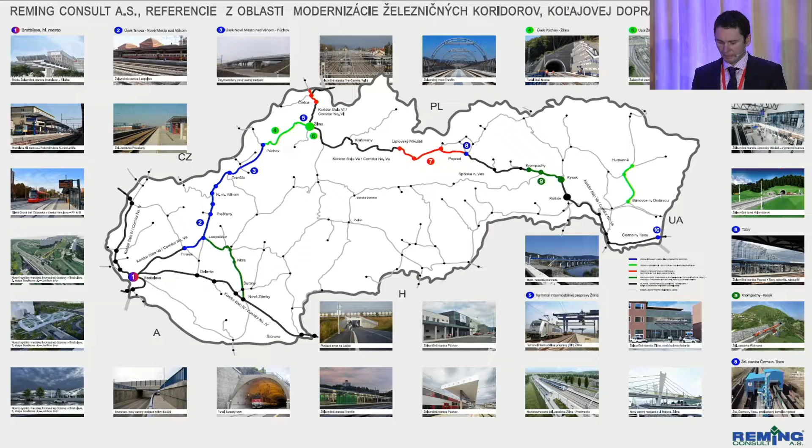If you are on the train and you go from the west to east, many of our projects are deployed on this route. When we talk about BIM and railways, the other European countries started to join the BIM environment much sooner. Previously, London, they really went from A to Z, did everything that was supposed to be done, all of the components. They did have various CDE environments, zillions of documents, and everything worked well in this environment.

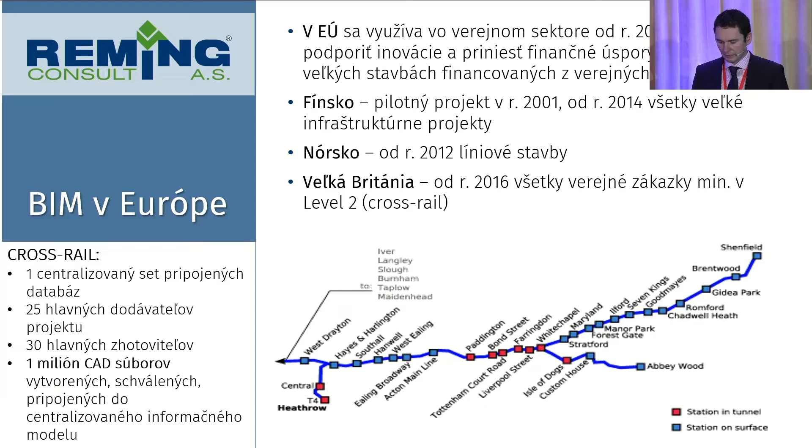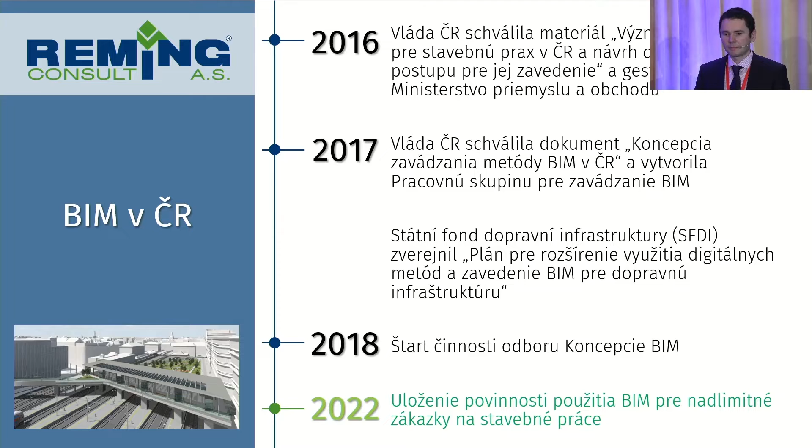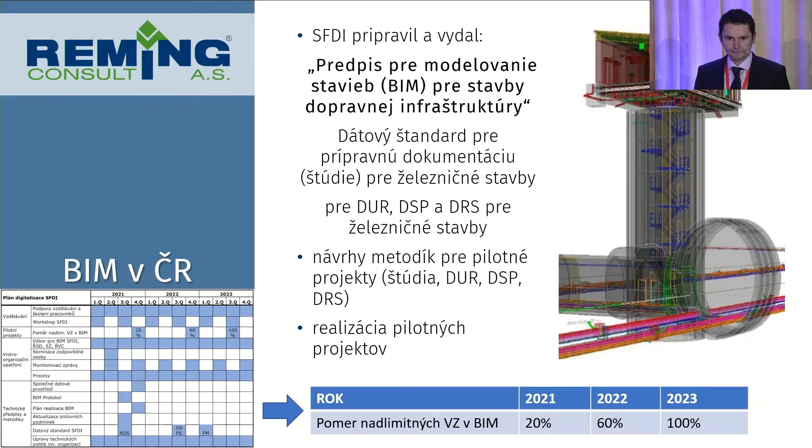When we take the Czech Republic, they are much faster than us. Next year, they will be obliged to use BIM for projects above a certain financial limit, and they also have a decree for BIM modeling for infrastructure projects. This year they are at the level of 20%, next year at 60%, and in '23, 100% of their projects should be carried out through BIM.

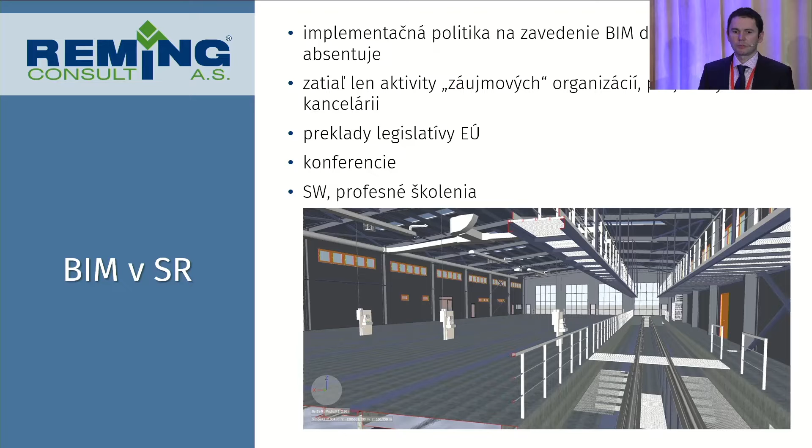Unfortunately, we do not have the right policy. So far, it is only an initiative of associations, interest groups, and businesses, and there is more and more software out there in the market, but there is no systemic effort. How do we define BIM? I would use the US definition: digital representation of functional and other types of characteristics of structures. BIM creates a reliable basis for decision making in the life cycle of a structure from the very beginning until the elimination of the building.

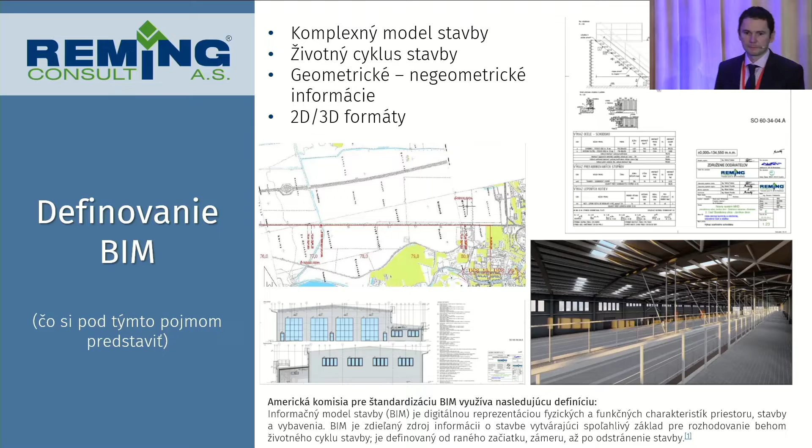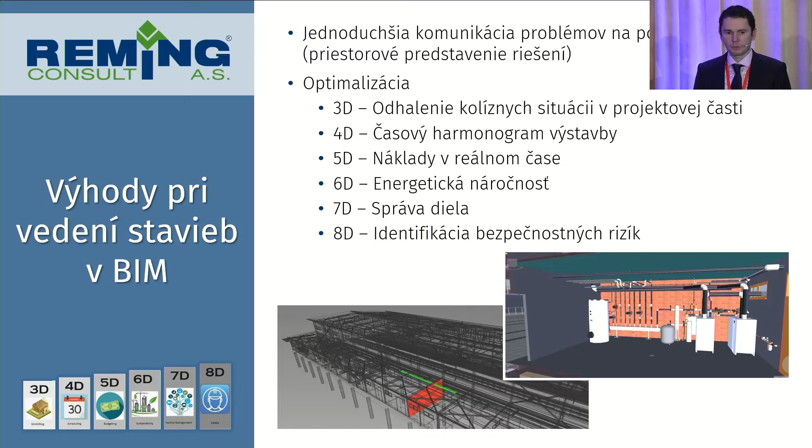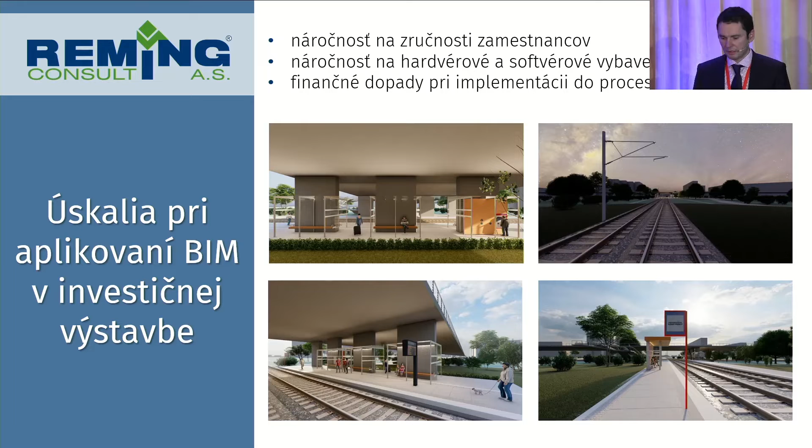What kind of advantages does BIM offer? Many think it's only about design, but there are many other components, and each of the companies deploying big projects does those things anyway, but those individual components are not combined into a big whole. What are the challenges? The employees need to learn new skills, and the company needs to have both software and hardware. And many times, since people have a certain idea of what it is, they can't define it. Here we see railways in Petržalka, close to Bratislava, that are to be implemented soon.

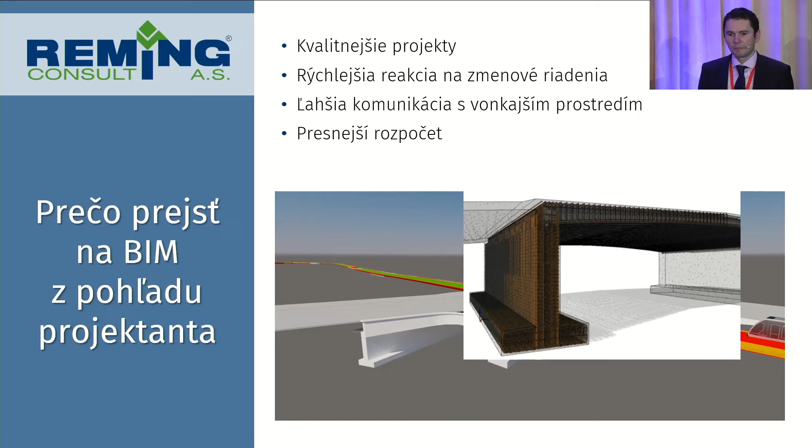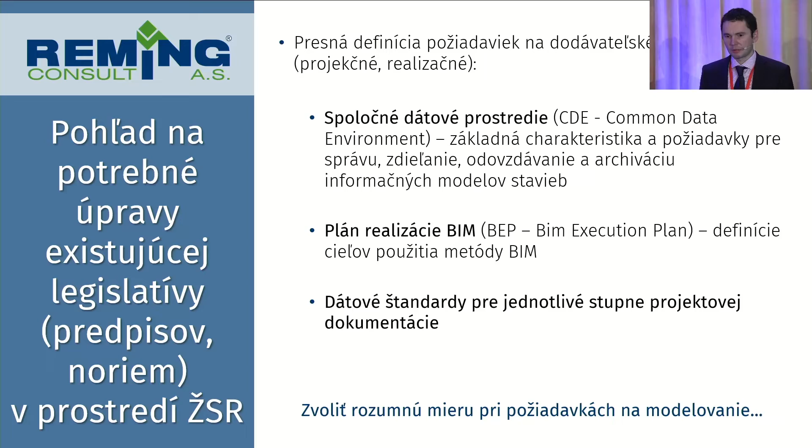What do we want to achieve? Why should we start using BIM? We want projects of higher quality and a lower number of mistakes during design, because in 2D design, maybe we don't realize some of the mistakes. The lower the number of mistakes, the faster our reaction time and our efficiency, and since we have a more comprehensive model, we have a more specific budget. What do we need to do? We need to define a common data environment that will be the backbone of communication in the project. We need to correctly design a BEP, the plan, and we need data standards that we do not have so far under our legislation.

This is a visualization from the Žilina project. Why make videos like that? We do EIA and studies, and we also need to deal with public discussions of the projects. And of course, you meet people there who can't read the drawings. This kind of visualization gives them a better idea of how the project would look and what we are going to do.

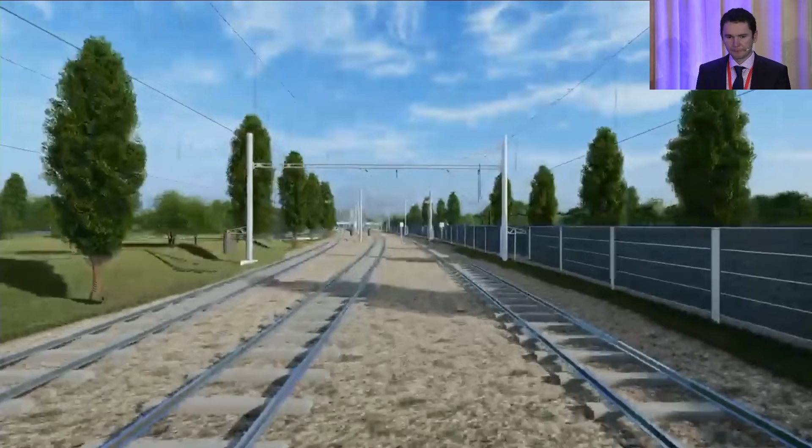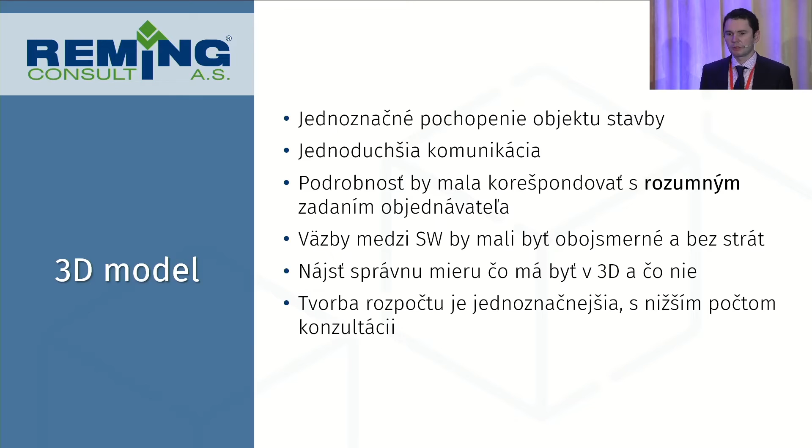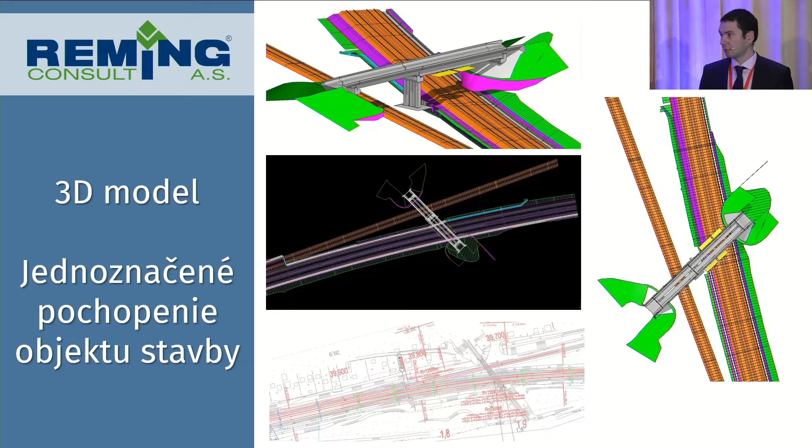3D modeling gives a clear understanding of a structure. Of course, it brings about easier communication. Of course, it should correspond with the meaningful requirement or definition of the investor. It can also help us to clearly understand the structure, it is understandable to laypersons or representatives of other professions, and this visualization can show us details that we would otherwise not take notice of.

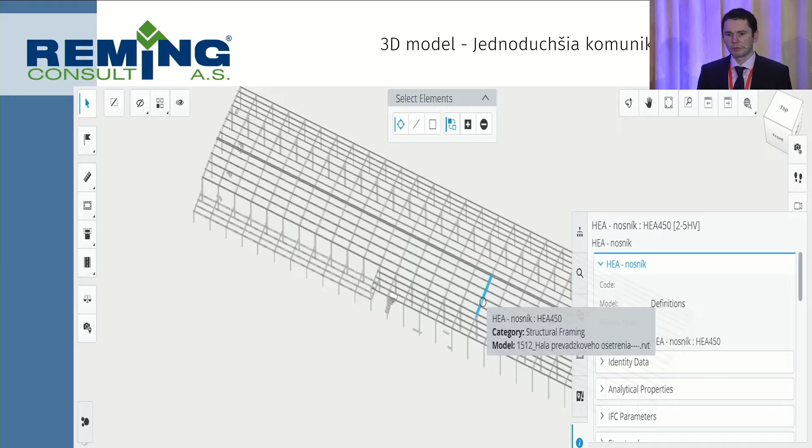A 3D model also brings easier communication. We can visualize individual elements with certain attributes, specify those elements at the site, further review it, coordinate the processes, or make needed adjustments. What do we need to do? At the beginning, we need a very good scan, either via GPS or drone.

This input is stored in our 3D environment. And based on that, we need to map the state-of-the-art or the status quo, and then develop a new documentation of the project.

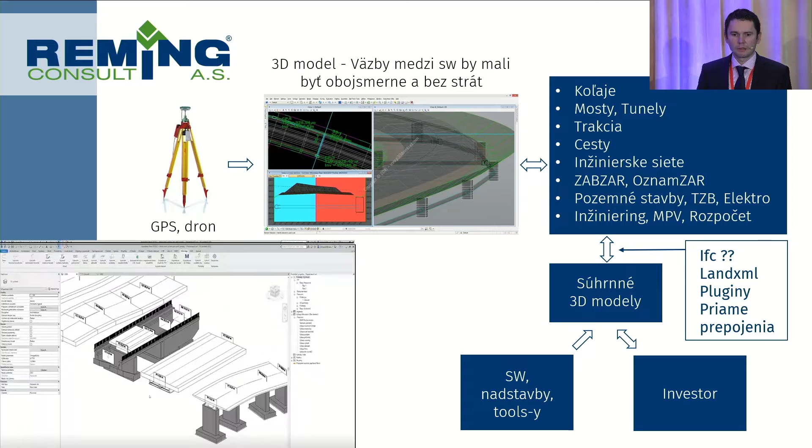And since this is a relatively new profession, we need to align a great number of softwares that need to communicate among each other, and it is a great challenge to secure that there is no loss of information or any data in the transfer or when those softwares communicate. Since we have public projects, many times the question we get is how will it look, and they are not all that interested in the functionality.

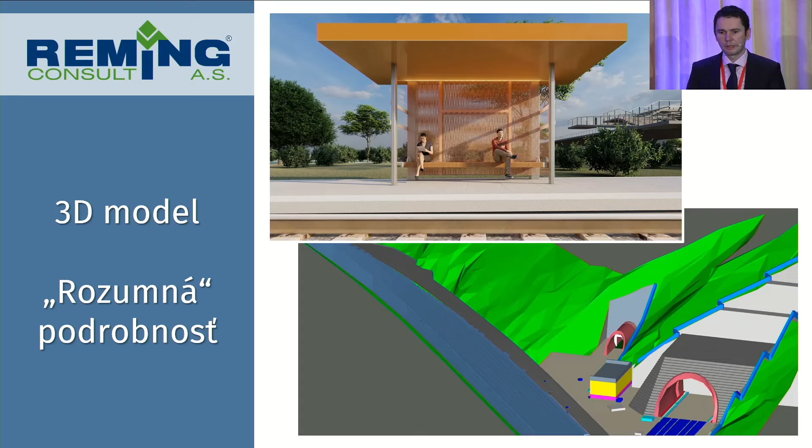This is a railway stop, the project that we are about to finalize. What should be in 3D and what not? Of course, you can't connect everything.

I wanted to play a little video, and let me try to make it work.

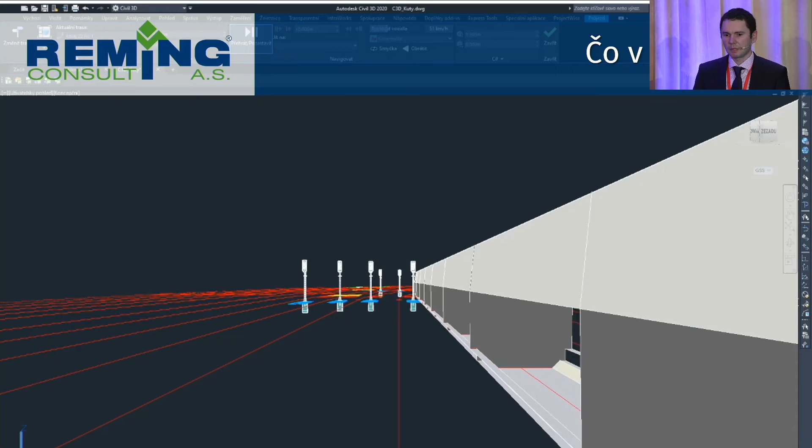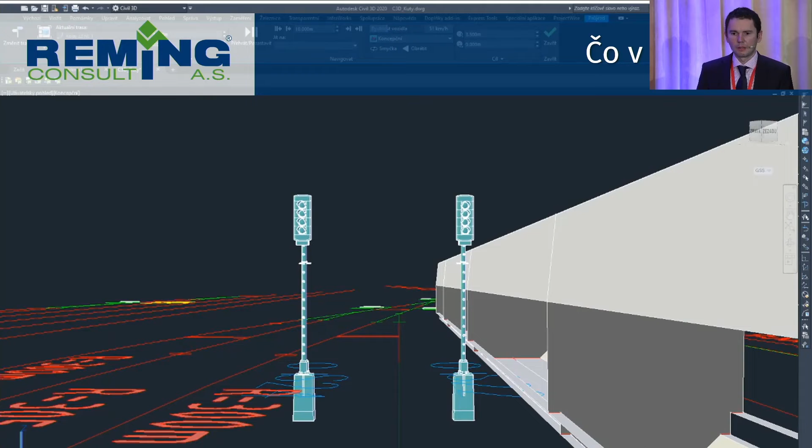This is how our Zaptar group works. Not only does it prepare functional schemes for the whole railway, railroad, but it needs to identify where to place the individual elements of the structure. The train conductor needs those signs to be able to stop safely. And this is a Malacky project where we need to deal with those details.

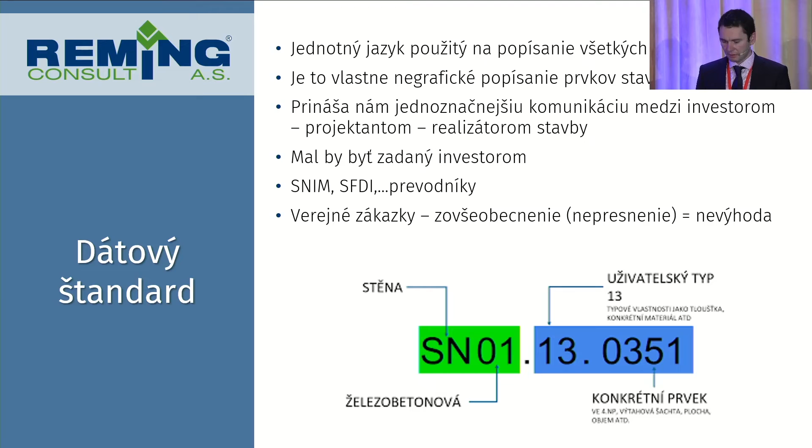Data standard is actually a birth identification number of each and every element. And so far we are waiting for a certain standard to be accepted in Slovakia and to start working with it. Currently, we just need to test what is out there, and we use different standards that are used.

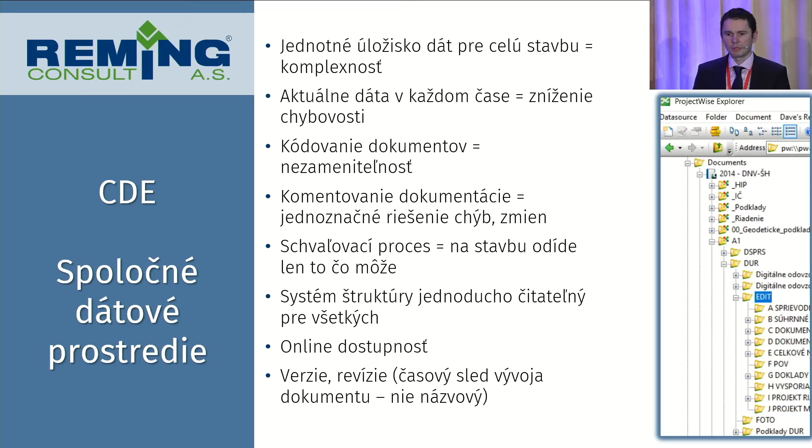CDE, that means Common Data Environment, for the whole structure. There can be no other data environment. Current data or up-to-date data at any time, that means lower error level, and document coding. Often the documents are copied and moved somewhere else, and we need to be able to identify what it is.

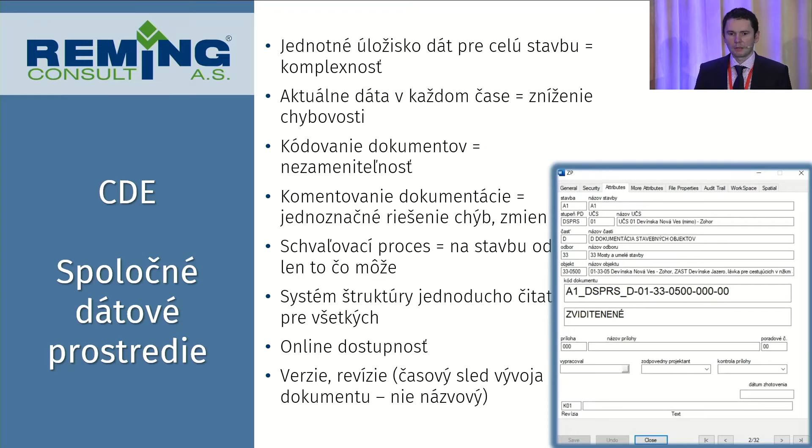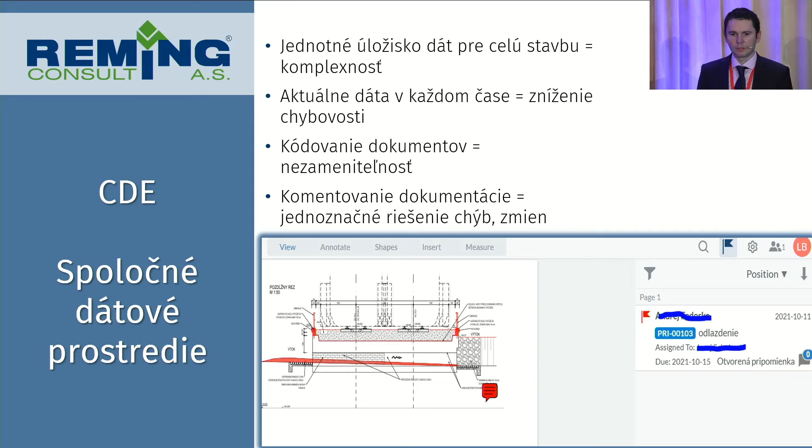Reviewing the documentation, CDE is a solution. You can just enter your comment and send it to a responsible person, with an instruction of what he or she needs to do. Approval process. Each and every document has its own cycle. And of course, those cycles are different, and the approval process should really guarantee that only flawless documents are published or go out to the system.

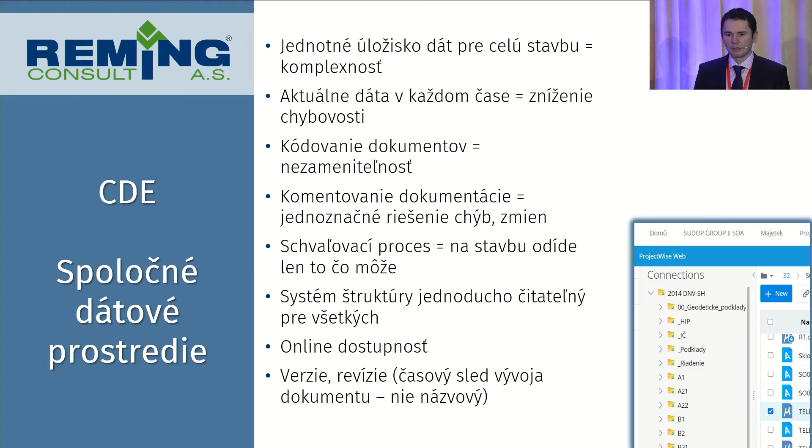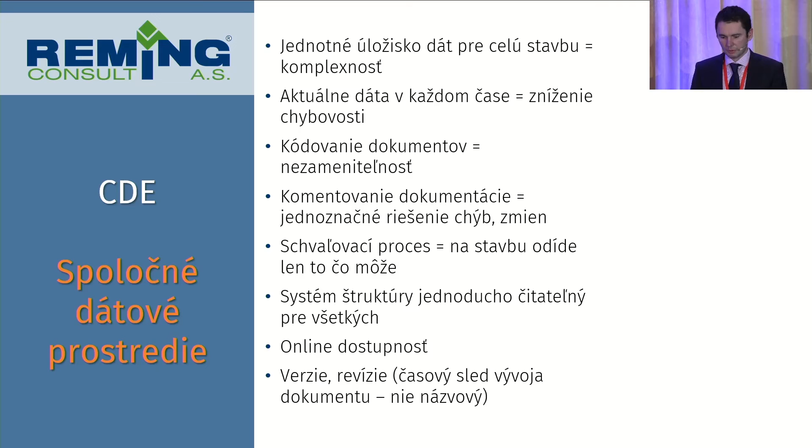If we use coding, the system will be legible, simple and clear. Of course, the documents need to be easily accessible, not only for us, but also at the construction site and for the subcontractors, contractor, and for the investor. What's also important is that there should not be two environments at those two sites with the data copied manually, because this only leads to mistakes.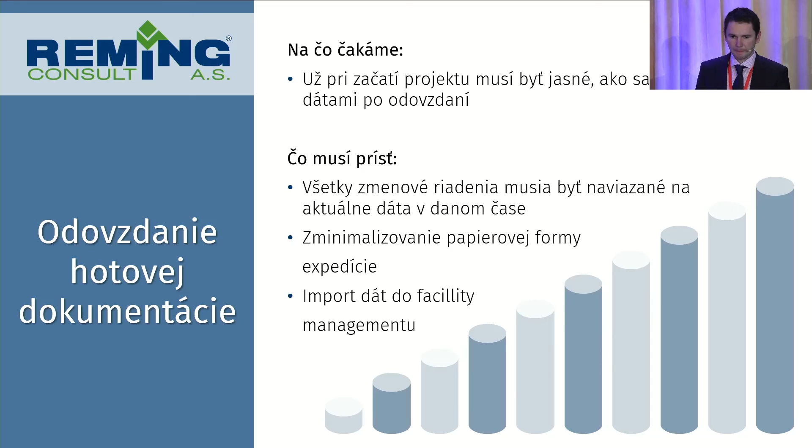Handover of the documents. So far, nobody defines what to do with the data after the delivery, or what to do with the data as such, whether we should give the data back to the client or what to do with it. We, for instance, know that the railway company has its own system for asset management. So far, we haven't had the chance to see whether we can connect our systems, so that the handover would be flawless and wouldn't introduce any mistakes and errors.

What's ahead of us? We need to study and more study. In the future teams, there will be BIM managers, coordinators, programmers, designers. So far, this hasn't been the case. And of course, we also expect the investors will understand that more time in the prep, that means cost for designers, equals cost and time savings during the implementation of the project.